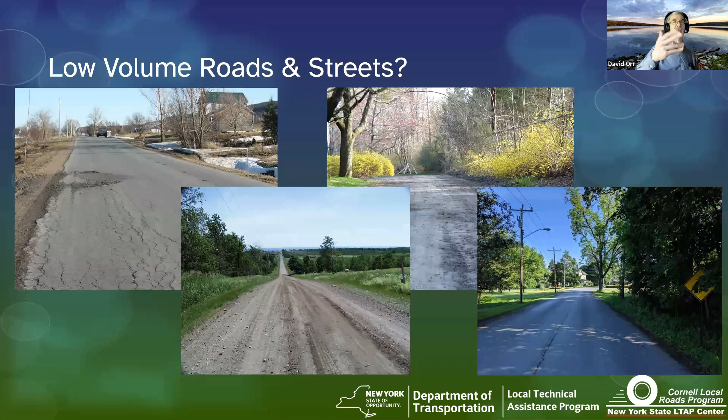Something for us to keep in mind as we're thinking about what is low volume. Let's go through some of the answers you gave, and some we've picked up over the years, and talk about whether they really are low volume. Then we'll come back to what is the defining number for low volume here in a minute.

One of the most common things people use is the word local, by far. In fact, sometimes people use those interchangeably. But local actually has a specific definition to it. We'll come back to that.

A lot of people think of it as rural. We've heard that in our word cloud, or out in the country. That's what a lot of people think: oh, that's rural, that's a low volume road. But obviously the interstate system belies that, because most of the interstates out in the country, in rural areas, doesn't make it low volume.

Residential — generally in an urban area, a village, or a suburban town — a residential street does have less traffic on it than a main road does, but it doesn't mean it necessarily would be low volume. So you have to balance that activity.

We saw gravel on the list, and generally yes, a gravel road is probably low volume, because the economics will tell us we should be paving it if you get too much traffic on it. We'll talk about that in just a second.

Slow speed — nobody said that, mainly because we're dealing with a bunch of highway folks. If I ask this question of elected officials and citizens, a lot of them say slow speed for low volume. And you and I both know that sometimes low volume roads, they actually go faster.

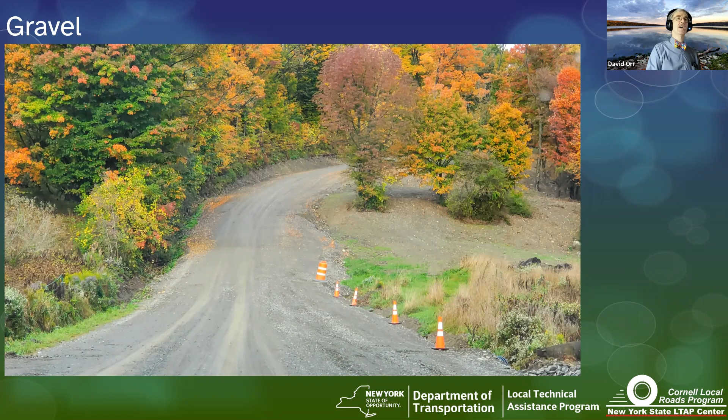We typically think of low volume and slow speed as synonymous, but they're not. Whether you're in urban areas or rural areas, speed is not a direct surrogate for traffic volume. In fact, a lot of times we put in traffic calming, which is a whole different class, specifically because we've got that conflict between wanting people to be slow because it's a residential area or there's really no need to go that fast, versus a demand that people want to go past a certain location, and people tend to speed. So there's that balancing act. Speed, volume, and safety are actually not surrogates of each other. They're correlations, there's relationships, but be careful. We'll talk a lot about safety as we discuss some of these standards as we go along.

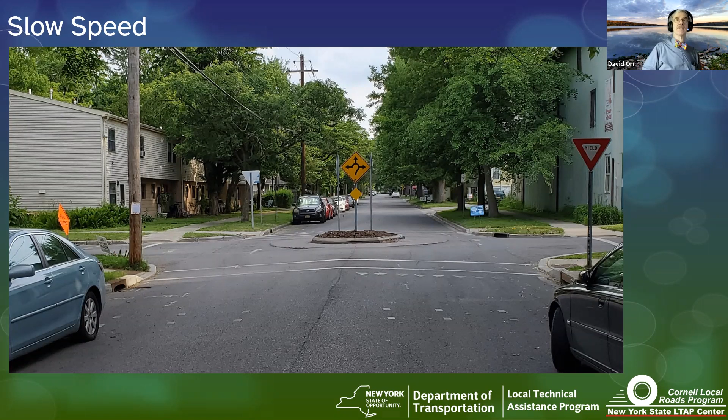What I really want to make sure we understand is that the design of the road should be driven by the road user. That road user could be the residents who live along that roadway. It could be the travelers who go from point A to point B, commuting every day to work or to school. It could be truckers and commercial vehicles taking goods from market to market, supplying us with food, groceries, and things like that.

It could be taxpayers who have nothing to do with that particular roadway. If you're in the town of Ithaca, the taxpayers who live up in the northern part of town on the eastern side are still paying some taxes for a road that's 20 miles away. If you're in a county, it could be 40, 50 miles away, but they're still paying taxes. So you have to keep that in the back of your mind. And of course, about 90% of the towns in New York State elect their highway superintendents, and this is an election year, so about half the highway superintendents in the state are up for election. They have to think about the voters, and the voters may or may not be direct taxpayers, but they're certainly affected by those taxes.

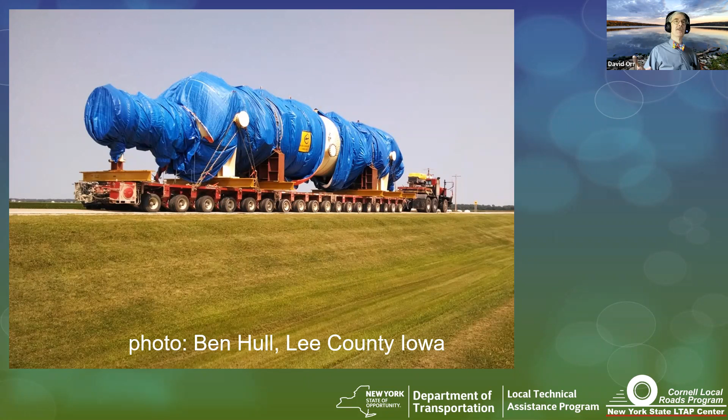So now you keep asking, so here's your opportunity to put in what is a low volume road. I'm going to let you put in your number for what a low volume road is, and we'll see how this works. I think it's supposed to be you put a number and people are able to rank it, but I'm not sure how it works. I've not used this particular polling technique before, so we're going to see how that works.

3,000, less than 3,000, okay. Less than 200, 1,000, okay. People are putting in words as well as numbers. Okay, we got 3,000, 2,000, 250. 1,000 is waiting at the moment, okay.

At the Transportation Research Board, there's a committee on low volume roads. I serve on that committee at the moment, they cycle people, and I like the way they do that. I served on it once before and I'm back on it again. There are huge debates about defining this line of what is a low volume roadway, and I'll show you over the course of the day the two most common lines used. Surprisingly, most of the public likes 1,000, but 1,000 is not the one settled on by AASHTO and some of the other committees looking at this. There are two numbers, centered on each side of 1,000. So 1,000 is a pretty good number when talking to the public, but we'll come back to the two numbers used by lots of people.

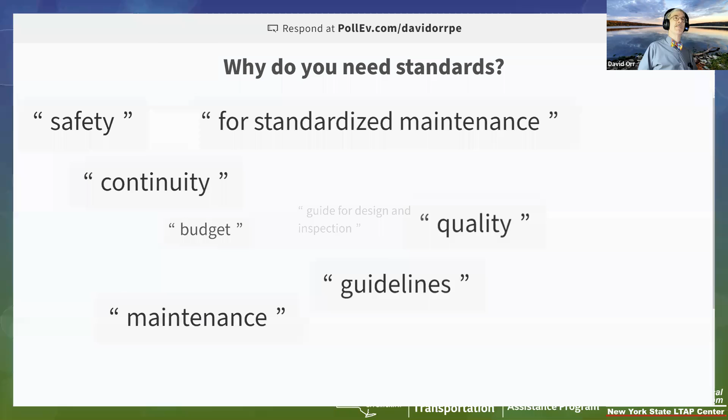Safety is actually one of the most important reasons why. Let's see how y'all did here. I think you're doing a pretty good job at getting all the items on my list, but there are a couple we missed: designed for inspection, consistency, and budget, meaning money.

Let's talk about these items. I bring it up because, like it or not, liability becomes an issue. You really want to reduce your liability. You don't want to get sued because you've got a pretty good road, but somebody wants to hold you to a different standard. If you have no standard and something happens, a crash, we'll talk about that next, and there's a lawsuit, the lawyers involved are going to try to hold you to somebody else's standards.

So do your roads meet the federal and/or state DOT level standards? And if they don't, can you defend them in court? Having appropriate standards can really help you in court, especially if they carry the standards of a national agency behind them, because then someone would have to show that your standards are inadequate. If they've got a national imprint behind them, you're in great shape—from a liability standpoint, one of the best reasons to have standards.

But just as important, and I think even more important, is safety. Good standards improve safety, and even on a low volume road, good consistent standards really help from a safety standpoint. We talked about crash rates being higher on the low volume road system, and a lot of those crashes occur at locations that don't even meet the standards we're talking about today. So it's really important from a safety standpoint, and consistency matters.

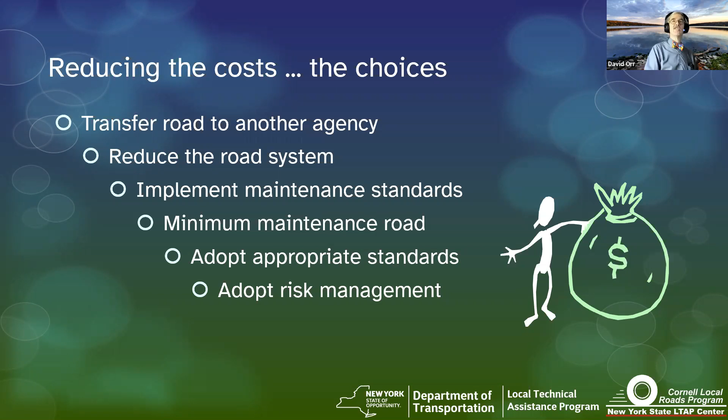All of this comes back to adopting appropriate standards, which is what we're focused on today. We're starting with geometrics. And I hope everybody has a good risk management plan in place to reduce your level of risk, and the standards, as we talked earlier, will help you there. Now, really, if you think about it, everything I've talked about today and everything we're talking about in some respects comes back to communication. A good set of standards communicates to the public what the expectations are.

So it really is a communication issue. And when people ask me what the three most important things in roads is, I usually jokingly say drainage, drainage, and drainage. But actually, truth be told, my big three are almost always the same. The order might change slightly, but it's usually safety, drainage, and communications. You do those three things well, everything else gets pretty easy.

So what are we going to do if we want to adopt an appropriate standard? What's the implementation process? Well, first, we have to adopt the appropriate standard, and that's what we're actually going to be doing here. We're going to be talking about some possible appropriate standards after our first break, though. Actually, we'll probably start with a little bit of that discussion before the first break.

To do that, you have to know what those standards are and then make sure they work on your system. You need to go in and classify all of your local roads, okay? Because when you're dealing with low volume roads, you have to define whether that road fits more as low volume or not. So what standard is it going to fall into? Because your standards are going to have some variation, some ranges to it. So you're going to have to classify all of your jurisdiction's roadways. So if you're with a town, all the town roads. If you're with a city, the city roads or streets. And if you're with a county, it would be the county road or highway system, okay.

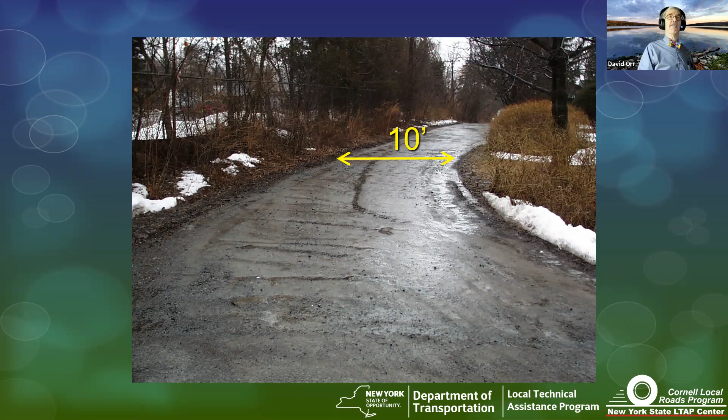By far, most of you, if you could only choose one answer, are choosing B, 22 feet. I don't blame you, for most of our road systems that's probably not the end of the world. But if you think about it, if it's low volume, residential only, 10 feet may be enough. In fact, this is the road I live on, Vine Street. It's got a little odd history, but it's only 10 feet, and it serves the need of the people on it.

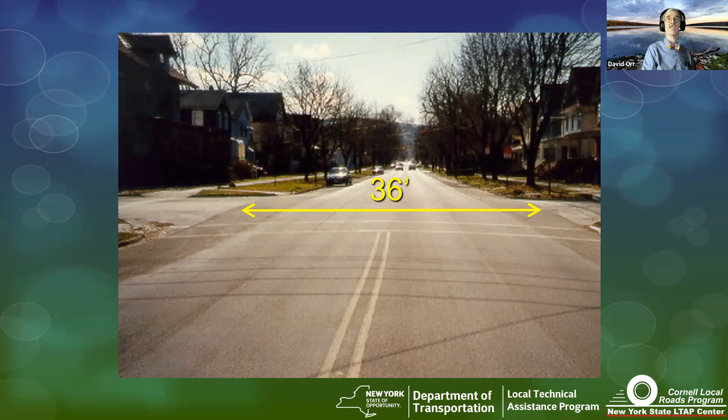This is a road in Yates County. When I was at Yates County, 22 feet was our standard, and that's actually a problem. We should have variations that deal with reality. If you're in the city of Ithaca, 36 feet curb to curb, if you're allowing parking, is probably what you need in a lot of cases, especially if there's buses and it's a higher volume roadway outside that. So if you only had one, yeah, you'd probably pick a number like 22. But the reality is your standards need to have variation in them. Maybe not this much, but the idea is have some variation.

Now, what are appropriate standards? They're clear and easy to understand. I've seen way too many complicated standards. When I first got here to the LTAP Center at Cornell, one of my first tasks was to develop standards, which we now support, and you'll get a copy of, and we'll talk about quite a bit after the first hour and the second hour.

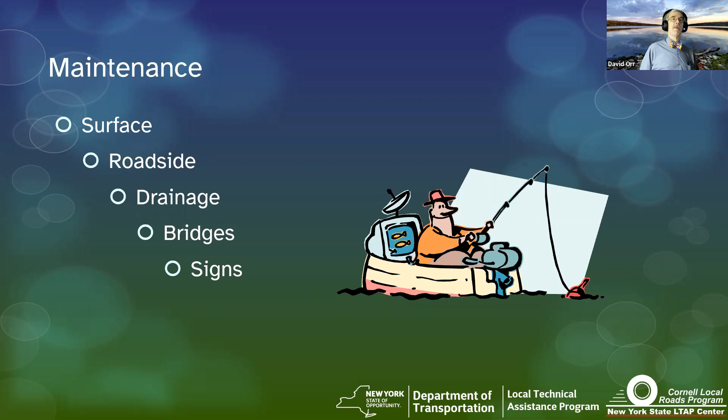Now we're going to take our break, then start back up, and I'm going to spend the hour talking about geometric standards that are out there. We'll spend a little time on the history of geometric standards to help you understand where we're headed for developing your own.

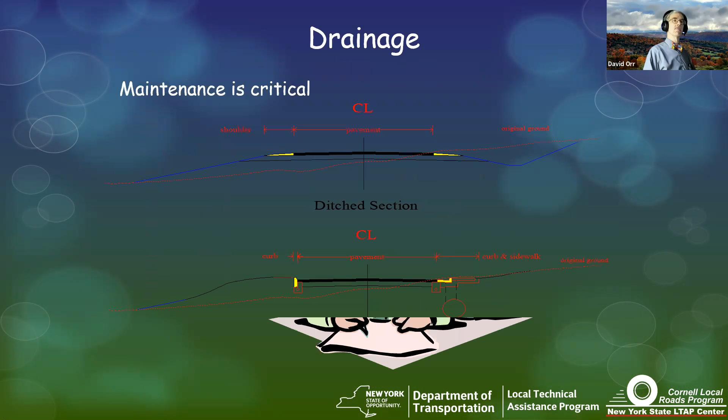Okay. We'll be starting back up here in about a minute. And Amanda, I promised I'd find you that picture of the valley with the fall colors. It's now my background.

Okay, we're going to get started back up now. What I want to do this hour is talk a little bit about some appropriate geometric standards that exist for local and, more importantly, low volume roadways. The key is what makes a good appropriate standard. We talked a lot about that before the break, but what I really want to do is talk about the history and some existing standards that you can use and may need to use for your higher volume roadways, but also the history of how our roads got to where they are.

Now, you may have heard of something called the AASHTO Greenbook. It is the American Association of State Highway and Transportation Officials, AASHTO. It used to be the American Association of State Highway Officials. And the original construction and design procedures actually fell into that procedure.

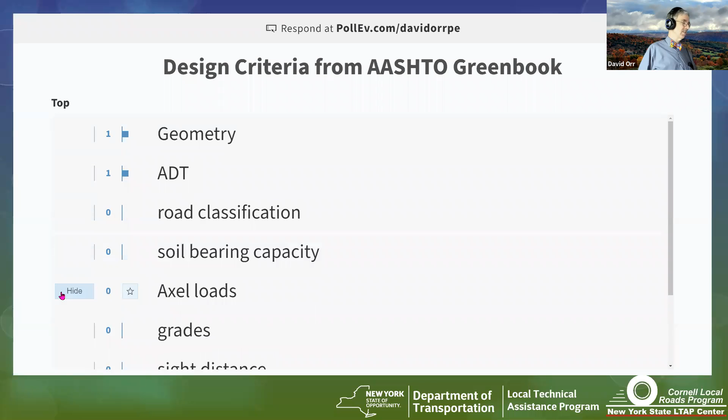So, bearing capacity—now we're talking geometrics right now. The Greenbook is completely on geometrics. It doesn't deal with thickness; that's a different standard, a standard for thickness. So I'm going to hide that for now, since we'll talk about it next week. And axle loads, the same thing. Those are all very important standards, but we'll be talking about them next week.

Okay, so geometry, ADT, road classification, grade, sight distance, safety, design speed. Again, the ones y'all have upvoted are geometry and ADT. Not a lot of votes, but a few votes.

It's important to understand where standards start from, where do they go, what actually defines how we get to that particular location. And while most people would probably think that design speed is a design criterion, it actually is not.

Let's go through what the AASHTO Greenbook uses for designing roadways. How do we get started? Like in a culvert, is it inlet or outlet control? For roads, what does the Greenbook do? If you're wondering, the state has a standard that follows very closely to the AASHTO Greenbook with some minor modifications. It's called the Highway Design Manual. If you're interested, you can get it, and there's a link. It's pretty easy to find off the web.

So the three criteria. The first one is classification, functional classification, going all the way back to the first hour when we talked about how FHWA and DOT define roadways. One of the reasons they define roadways by functional class is so they can design the roadway - what are the standards that we follow. So the three choices are arterials, collectors, and local roads or streets.

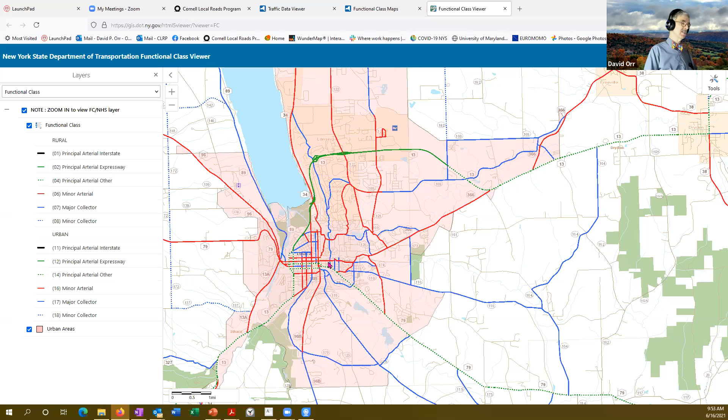Honness Lane, the town of Ithaca. Okay, we can do Honness Lane, I even know where that one is. Someone else said Maple Ave. You could do anything, but let's just go in here. So we go into Tompkins. You can zoom in, you can also search. So Honness Lane is down here because I live in this area.

And if you get down to Honness Lane, for those who are wondering, it's the horizontal line right here between the red and the green. The green is an arterial. The red, which is Pine Tree Road, is also an arterial. A lot of people who live on that road don't want it to be an arterial, but that's what it's defined as. Honness Lane is defined as a local road or street, so that would be local.

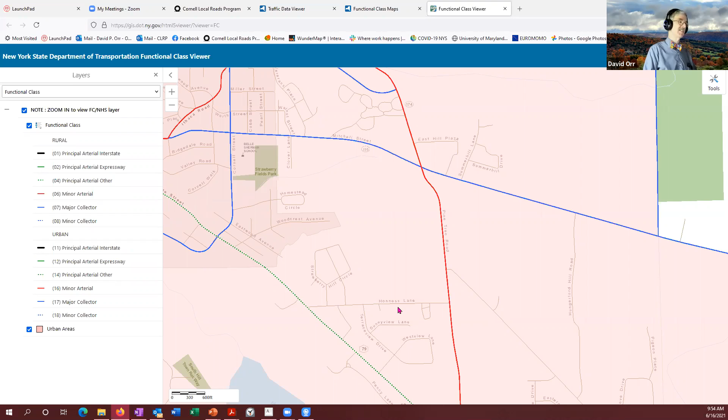And if I pull out a little bit, you can actually see just by colors - the red, which is a minor arterial, the blue, which is a collector, the green, which is an arterial. So the red and the green are the arterial system, and the blue is the collector system. There are roads on here that you can think of that are defined that way, and that's how you would go into the design standard to define them by that technique.

Can they change? Yes. Should they change? Yes. Do they change easily? No. But that is one of the standards. The next standard we look at is the terrain. Someone said slopes or grade. The terrain, we typically define into three different classifications: level terrain, rolling terrain, and mountainous terrain.

One of the things that's really nice about New York State, but also causes us some grief, is that within a single town-sized community we can have all three terrain types very easily. In Yates County, we had large sections that were technically mountainous by AASHTO's definition, like over in the High Tor area where it's pretty steep. Mountainous doesn't mean big huge mountains, it's just the terrain level versus a rolling countryside like you might see in the Finger Lakes. Along the lakes where there are gullies, you can get technically mountainous terrain versus level.

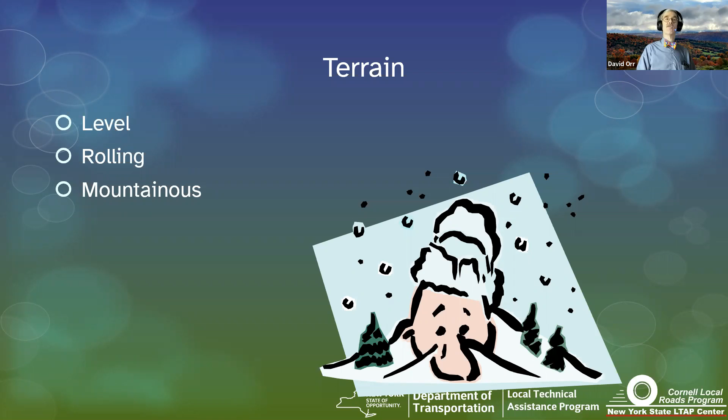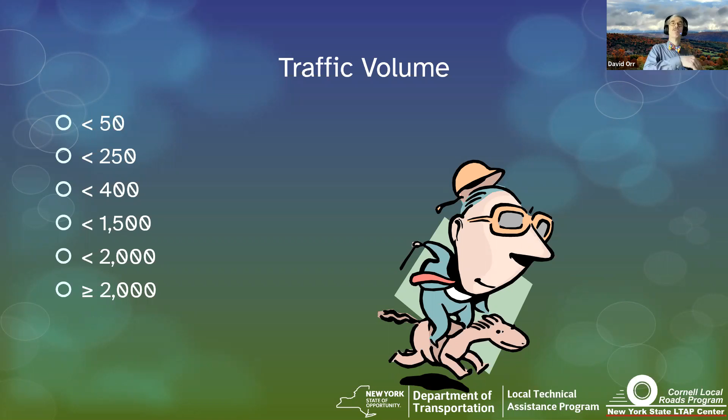So terrain is one factor, and then of course traffic volume. The most common ones are for local roads. Once you've picked the local roads, these are the traffic volume ranges you see on the local road system: 50, 250, 400, 1500, 2000, and greater than 2000. They've got 6 different criteria depending on those other 2 factors: local, and then either level, rolling, or mountainous terrain.

All 3 of these things together combine to give you the design speed. The design speed is not where we start, it's where we end. We get the design speed that will range, for most local roads, 20 to 60 miles an hour. There are some faster than that, but for the most part 20 to 60 miles an hour is the design speed for the local system. All the geometry comes from that, the design speed for the vehicles using that particular roadway.

By far the most commonly used number out of the design speed is the stopping sight distance. The criterion for stopping sight distance has changed over the years, but here's the current standard: it's the height of the eye of a driver in a sedan, technically listed as 3.5 feet or 42 inches above the pavement, and a height of an object 2 feet above the pavement.

What is an object 2 feet above the pavement? What are we trying to not hit? So in the Q&A, tell me what are we actually defining that we don't want to hit when I'm looking down the roadway? What am I trying to not hit?

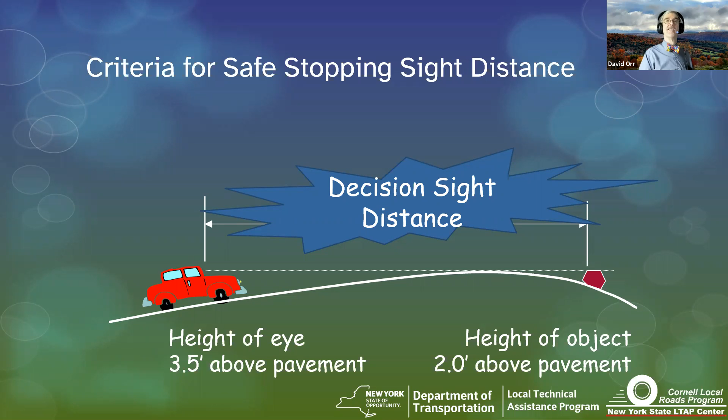So the question we always have to ask is, is it appropriate? Well, yes, it is appropriate for higher volume roadways. It's a very good set of standards and one we should probably be following. But if you think about it, those criteria may not be appropriate when it comes to certain types of roadways. Sure, for arterials and collectors it works pretty well, but when we start looking at local roads, there are some changes that occur. The traffic volumes get low enough that some of the things we're thinking are going to happen, such as conflicts with other vehicles, really drop almost to nothing.

So really, if you think about it, you almost have to look at roads that are above some criterion, and the criterion that was initially used was 400 vehicles per day—I'll come back to why in a minute—versus roads under 400 vehicles per day. There's some logic behind that, and again, we'll come back to that in just a minute. But things change when you get to lower volume.

If we're looking at the AASHTO standards for roads between 400 and 2,000 vehicles a day in a rural setting, local system, typically 2 lanes wide, the pavement width—not shoulder, pavement width—ranges from 18 to 24 feet. The design speed, remember, is based on terrain. The terrain behind me would be considered rolling, by the way, if you're wondering—rolling terrain in the valley near Preble, New York. And then the width would be based upon the speed people are actually doing, which comes back from those other criteria, so there's actually a little bit of duplication going on.

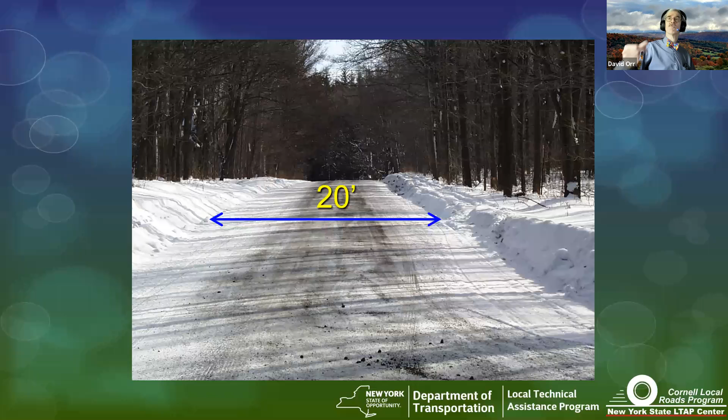Is 20 feet needed on a really low volume road though? Is it appropriate? Maybe not. So here's the problem: are we building too much up in our rural system?

Let's look at some data from a few years ago. They haven't changed that much by percentage. So while the volumes have gone up some, the percentages are still pretty much the same.

So if we break the roads down, this is data from the state DOT by interstate, other arterials, collectors, collectors less than 500 vehicles per day (that's the number the DOT uses), and local roads, again by functional classification, not ownership, less than 500 and more than 500. This is the portion of roads by centerline mileage in all of New York State.

As an example, Tim, I know you're on here, up in Lewis County, that road I showed, West Road or West Avenue, I can't remember which it is, that's technically, I'm pretty sure, a collector.

It's a very small volume of traffic overall, but by centerline mileage, local roads less than 500 vehicles makes up over half the centerline mileage in the state. If you combine together all of the roads that are less than 500, you're getting up towards 55% or so, and even above 500, you're over three-quarters of the mileage of the roads in the state.

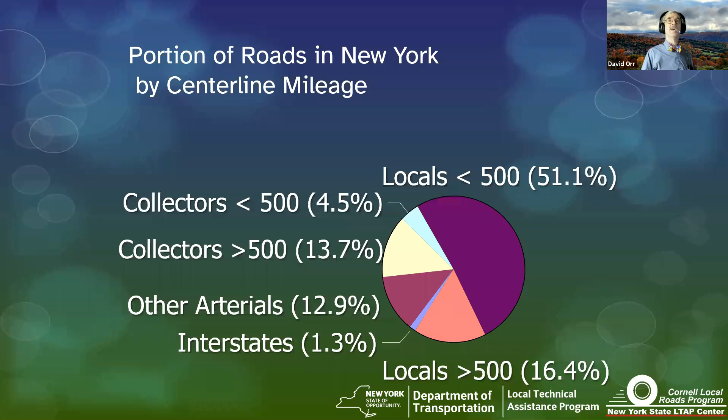Back in 1992, a report was generated by the Local Roads Research and Coordination Council, and they put out a guideline for rural town and county roads. The reason they did this was that they found the existing guidelines, i.e. the Greenbook, the existing guidelines for design and maintenance of rural highways having low volumes, were not appropriate. That's the problem - they weren't really appropriate. They were overly wide for the roadways as were actually used and maintained.

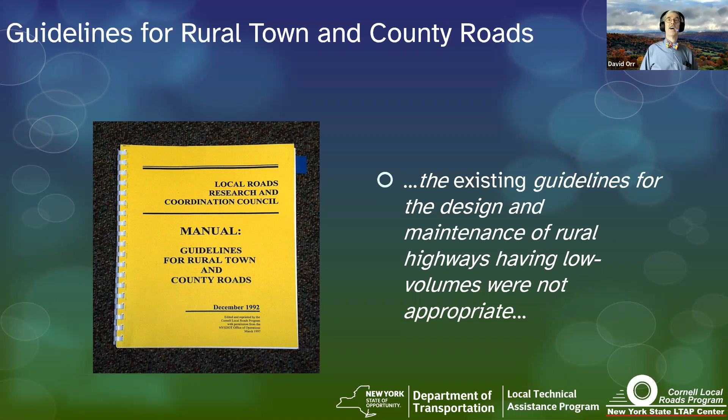So they came up with a set of standards. This was a commission put together by the first Governor Cuomo, and they define low volume roads as under 400 vehicles per day.

Now why 400, and the state reports 500, and we all talked about 1,000? Where did all these numbers come from? Well, before we do that, let's figure out what the traffic volumes are and show you a way you can actually estimate traffic.

I'm going to give you two really good ways to estimate traffic. Now, before I do that, if you own a traffic counter in your agency, raise your hand using the participant list. So I got a couple.

Cool, good. There are techniques for counting traffic. Even though you own a counter, there are techniques. Do you want the whole week count? So you've got to do the weekend. Do you avoid seasonality? Do you have seasonal issues? Do you do a holiday or not a holiday, and does that holiday really affect traffic volume? So you can do a traffic count, but there are techniques involved.

So if you're using those, please make sure you understand that. But I'm going to give you two methods. So in the Q&A, does anybody else know how I could get the traffic volume?

In this case, I've got a rural - this is actually West Avenue again - and an urban intersection. How could I estimate the traffic in those two areas? Anybody got an idea? I'll give you two, my favorite two ways to do this.

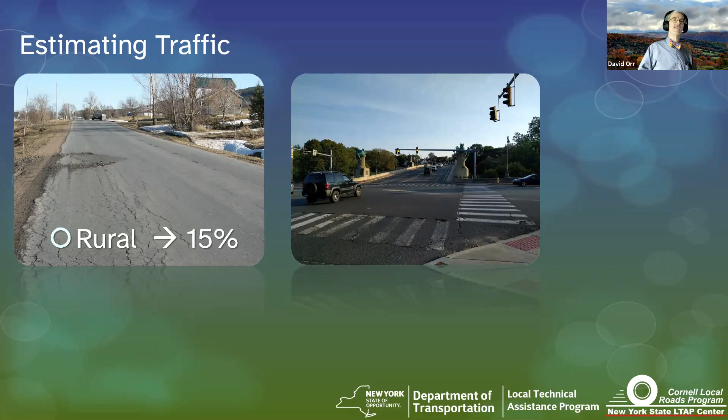So what you do is take advantage of the fact that in rural areas, the busiest hour of the day is about 15% of the traffic on that roadway. In an urban area, the busiest hour of the day is about 11% of the traffic.

You can actually take that into account. So what you do is go out during that busiest hour and count for just 15 minutes. You don't even have to count for a whole hour, literally just count for about 15 minutes. Though obviously if it's really low volume, you may need longer than that. But again, we're just looking to get us in the ballpark, and we don't need to be much more precise than that in most cases.

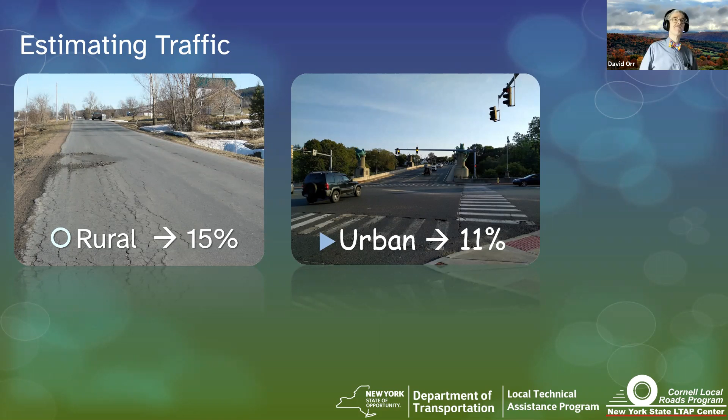You can actually turn that into the traffic count for the entire day. So if I count for 15 minutes, multiply it times 4, that gives me the 1-hour count for the busiest hour of the day, and divide it by that percentage. So in a really rural area, I divide by 0.15 or 15%. In an urban area, I would divide by 0.11.

And if I'm not quite sure—I know some of you are here from the town of Ithaca—if you're out on one of the rural roads that's suburban and you're not quite sure which it fits into, you could use 13%. It'll get you close.

And then decide what you need for a counter. By the way, if you have a counter and you do this little technique as well, and there's a big discrepancy, check—it could be an issue with the counter, or something about the traffic you're not aware of. Maybe there's a detour in the area. That does happen, so be aware of that fact.

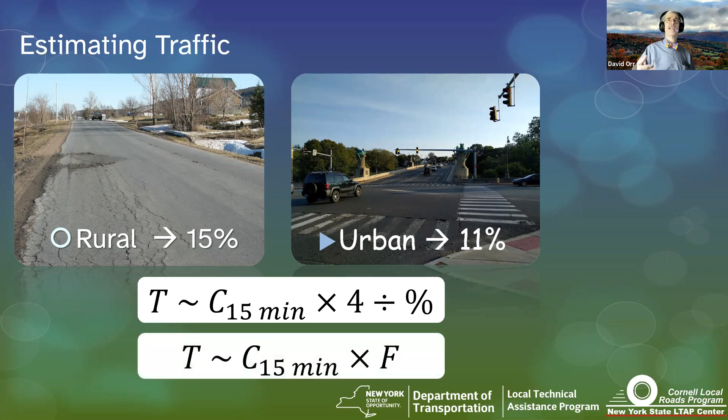Now, you could do that division, or you could also just use a simple factor, and again, most of the time we don't need to get down that precise. So the factor you'd use for rural areas is 27—you just take the count and multiply it times 27. In an urban area, you would multiply the number by 36. It's not exact, but again, we're trying to get close.

As an example, okay, let me see if my pen is being happy with me here. I'm just going to go out there and count in the morning, standing there when people are going to work. I stand there for 15 minutes, and in 15 minutes I count 15 vehicles.

So if I counted 15 vehicles, how many vehicles is that for the entire day? We'll start with our rural area—how many vehicles is that? You get out your calculator, and you can either multiply 15 times 27, or if you want, do the longer calculation, which is a little more precise but I'm not that worried about it: times 4, divided by the percentage. Let's see if somebody wants to throw the answer in the Q&A, and I'm going to write the answer down on the screen here.

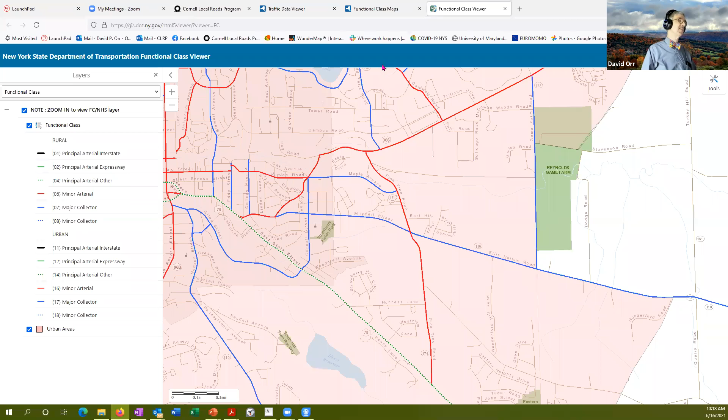Now the other way you can do a traffic count that I also always recommend to people - not only do you have a functional classification viewer, you also have available from the state a traffic data viewer. So that's on your notes, write down traffic data viewer. Absolutely cool tool. So I'm going to open the traffic data viewer. Again, it's GIS based, and you can get traffic counts on lots of roads. They're all stored into the system.

Every time I look at this, I'm always amazed by some roads that have counts. The state roads, almost all have a count on them. The local system, if it has a bridge, it has a traffic count on it. So anytime you've got a bridge, you're going to have a traffic count.

So let me scroll back down here into Ithaca. And the computer is going to, let's see if it's going to be nice to me today. No, it's still running. The traffic data viewer some days is... we'll try looking at your road. That would be up in Lewis County. Okay, we'll go back, the computer is being slow right now.

So I got Lewis County, and you think Brantingham? I'll search for Brantingham, it may not find it. It doesn't have every single roadway. And again, this morning it's spinning. That's why I don't rely on these things.

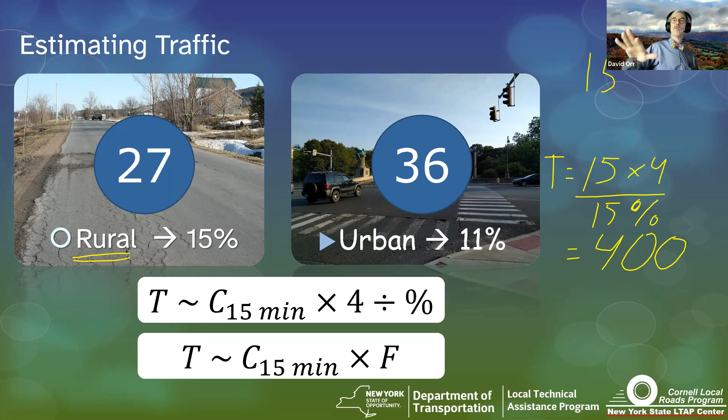And we'll see if the internet comes up and is happier with me a little bit. But that's a way to estimate traffic. And that's where that 400 line comes from that you'll see come into play. And those guidelines, they looked at 400 as being the cutoff point, because again, they were looking at rural roads more than or less than one vehicle per minute during the busiest hour of the day. And the idea was pretty simple.

Three typical road types, keep it simple but have flexibility. So they had an all-purpose road. They had an area service road, which is 2 lanes that might just serve residences or a farm. And then what they call the 1-lane area service road, maybe it goes up to agricultural lands or up into where there's a forest or something.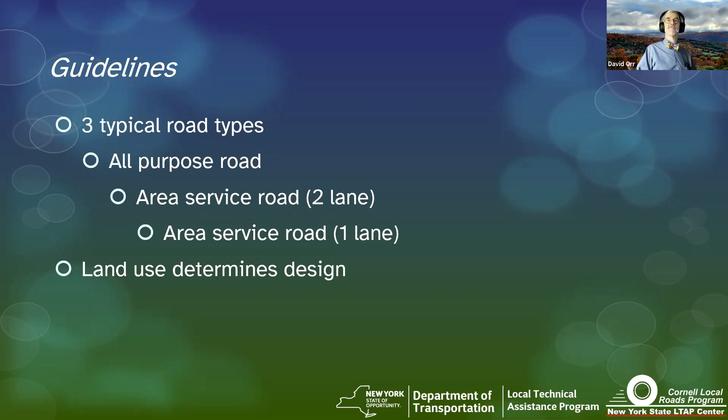Just 3 simple road types. But rather than going in with terrain and functional classification, they said, who's using the road? In other words, land use determines the design. So in terms of land use, they made a list of the different land uses that existed: low volume collector, major roads, residential, farm access, resource industrial, agricultural, and recreational land. And you would choose from there one of the 3 classifications.

Now, I will come back to this list when I talk a little bit more about a different standard. Just keep this in the back of your head. And if you're interested, this is one of the things we sent you to. You can download the guidelines directly from our website. If you're not sure what it looks like, it's got a cover on it with a weight limit sign. It's from the Legislative Commission on Rural Resources. They still support that document.

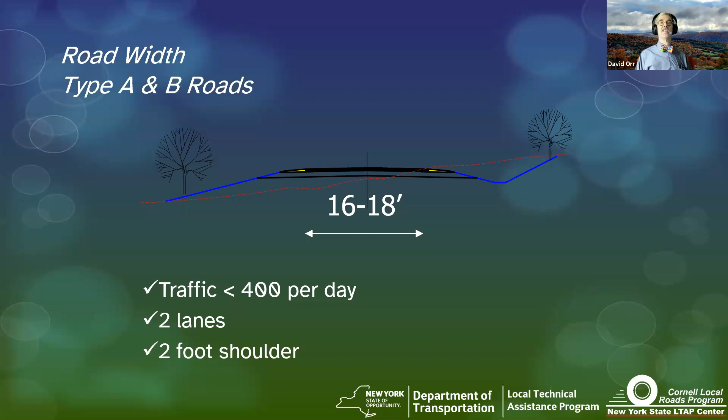The roadway widths, the A and the B, 16 to 18 feet. 2 lanes, 2-foot shoulder, low traffic volume. Slightly wider for an A versus a B, and slightly wider if you had a lot of trucks. You'd add 2 feet or 4 feet, depending on the truck volume and the types of trucks. In other words, design the road for who's using it, not defining it by terrain and traffic volume, but by the vehicles that actually need to use the roadway. So that roadway we showed earlier, 16 feet wide, serves the needs of the people who live on it, perfectly adequate.

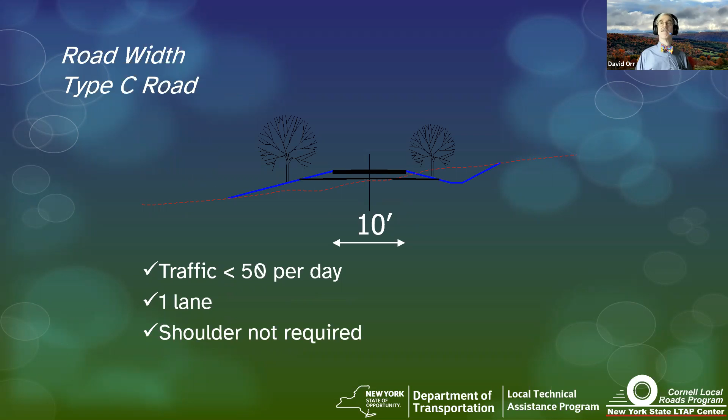Now let's talk a little bit about the minimum maintenance roadway. There's two choices. Here in New York State, we have a seasonal limited use highway and we have a minimum maintenance roadway option. We'll talk about that in just a little bit. But seasonal limited use highways, right now, as of today, there are no seasonal limited use highways in New York State.

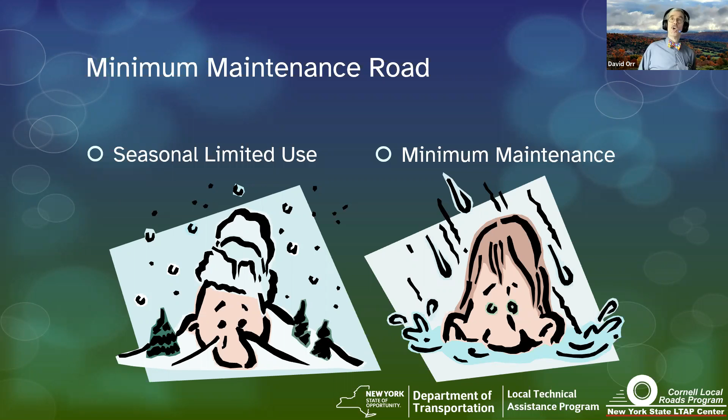Think about that. Well, the way the law works, it's Section 205 of the Highway Law. And essentially what it says is that the town, technically even a county road can be this, but it's in the town law portion. You can stop plowing from December 1st to April 1st.

You can only do this if there's no year-round use on that roadway. So it has to be declared by the highway superintendent by November of each year. So each year you have to look at your entire road network and define, hey, that roadway doesn't have year-round use. There's not a residence on it. There's not a farm structure that needs access in the winter. And so I can stop plowing it.

If someone builds a house on that roadway right now and they get an occupancy permit, you can't declare it a seasonal limited use highway in November. You have to maintain it. You've got to resume service. And that happens quite often, more often than we'd like. There's not a huge number of them, but for a small town, that can be a very expensive operation that you'd have to deal with.

The idea in the guidelines that they put out is the idea of the minimum maintenance roadway, and that comes from the Midwest. It's used quite often out there. And the idea is you can set any dates you want for any activity. You don't define just snow plowing. You might even close it in the summer. Maybe it's only roads going to a ski area, so we don't maintain it in the summer. We let it grow up and get weedy. We don't care.

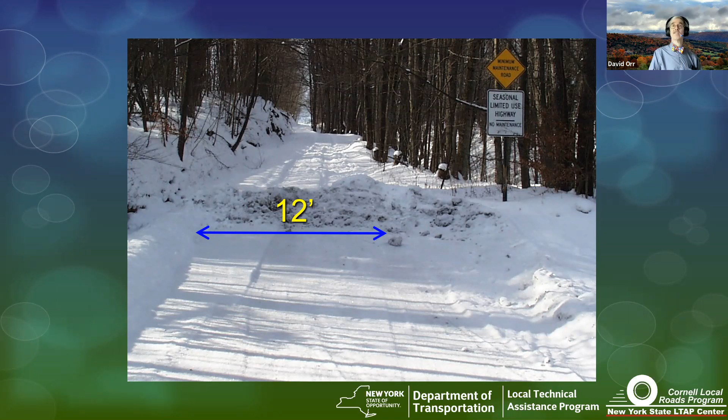This 12-foot wide width is fine for a seasonal limited use or minimum maintenance roadway. The bigger issue, however, is if someone did put a house on here, would you have to suddenly start maintaining it again?

That implementation process we talked about is part of developing minimum maintenance. You actually have to go through that whole process, not just of the roads you want to classify as minimum maintenance, but your entire road network. And that's really important, because you need a basis for saying why you chose this road versus that road.

Now, is this appropriate? Yeah, actually it is. You can go online, search for Tug Hill, and find a map of the towns that have adopted this standard. Most of them are in the Tug Hill, but there are communities all over the state. The closest one here in Ithaca that I know adopted it is the town of Caroline.

If you don't have any roads that aren't used year-round, there's no point. But there is an alternative that might help you out. Maybe not minimum maintenance, but AASHTO put out a set of guidelines back in 2001 for very, very low volume roads - less than 400 vehicles a day.

That was the official name of it - the geometric design of very low volume local roads. So it was a subset of the local roads section out of the big Greenbook. Over the years, they've made some changes to it, added to it. As of 2019, they have a new version.

Now, I will tell you, I've got a copy of it myself. It's only available digitally, but if you own the digital copy, you can print one out. It was updated in 2019, and you'll notice a slight design change or name change. The name is now the AASHTO guidelines for low volume roads.

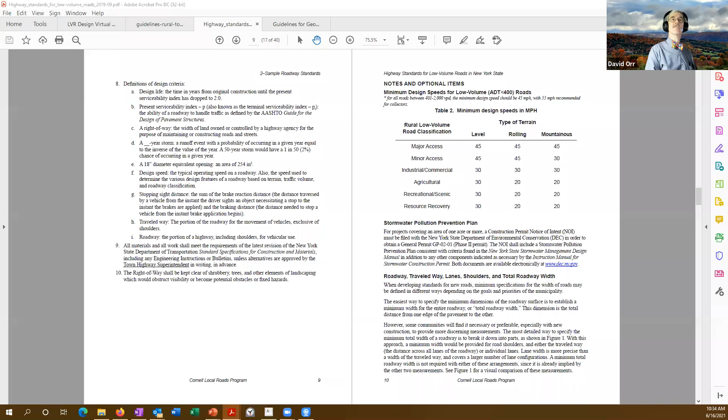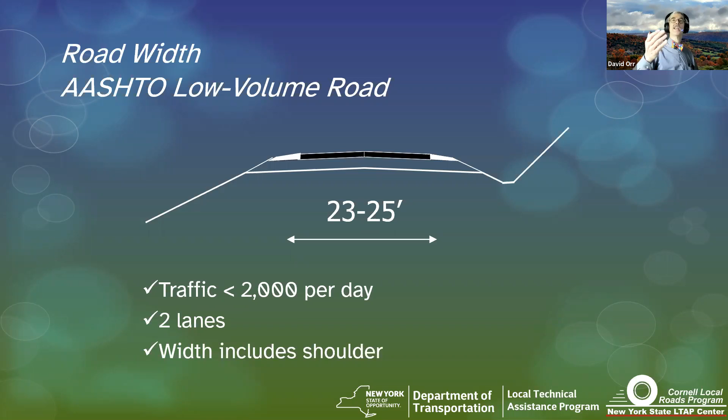And then finally, streets, 18 to 38 feet, which obviously is driven by whether there's parking lanes or not. If you don't have parking lanes, you might be down as little as 18 feet in an urban area, but it depends on the density and the number of channels. And if you're wondering what the number of channels means, it's not quite the number of lanes, it's more the number of vehicle sort of lanes in terms of channels of traffic that you need to take care of.

I'm not going to get into the complexity of it. Most low volume roads, just look at 2 and you're going to be fine. Generally, by the time you get up to having 3 channels, your volumes are high enough that you're going to be looking at the Greenbook anyway. Now, is this appropriate? Yeah, it's appropriate, but you have to define that.

So what we're going to do now is take our second break. And while we're taking the break, I've got a mission for you. There's something missing from the Greenbook, the little Greenbook as it's sometimes called, the AASHTO Low Volume Design Guides. I want you to think about what that might be. I'll give you a hint: these standards, while they borrowed them from New York, were developed by people who live in the Midwest. And it's not because they were bad, they just missed it. So ask yourself while we take our break, and we'll see you at 11 o'clock.

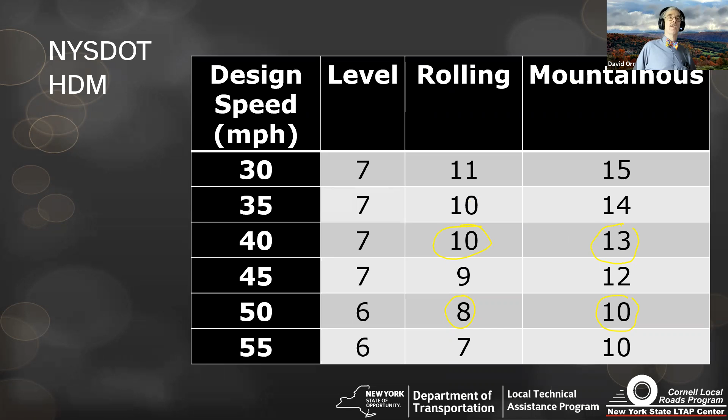The low volume guidelines only have two speeds, less than 45 and 45 and above. So typically I'd say, for my community, I'm going to pick a couple of criteria. I probably wouldn't go all the way down to 15, but maybe if you've got a lot of mountainous terrain, you go with 13 and 10. Versus if it's more commonly rolling for most of your area, maybe you go with 8 and 10. Give yourself some flexibility. You probably don't need to worry too much about it for the low volume situation, so you could pick rolling or mountainous depending on your terrain. And document it—document why you've done it.

So at the end of the day, you can have an appropriate standard. You can decide to either use the AASHTO Green Book in its entirety, and that's fine. And be honest, if you're with the state, you're going to use the HDM, and that's going to be the standard you use, and that's good—it's defensible, it's a consistent standard. Or if you'd like, you could use the guidelines developed by the Local Roads Coordination Council, or you could use the AASHTO Little Green Book. The difference between the two is, for the most part, the guidelines have a maximum ADT, or vehicles per day, of 400, average daily traffic, while the AASHTO Little Green Book goes up to 2,000.

You'll sometimes see both terms used—vehicles per day and average daily traffic—they're similar, I don't go crazy about the two. The nice thing about 2,000 is it really covers most roads in New York State that are in the local system, owned by local jurisdictions. And it has a cutoff inside of it of 400 vehicles between the two ends, and guess what, that's really a hybrid model anyway. And you could develop your own standards.

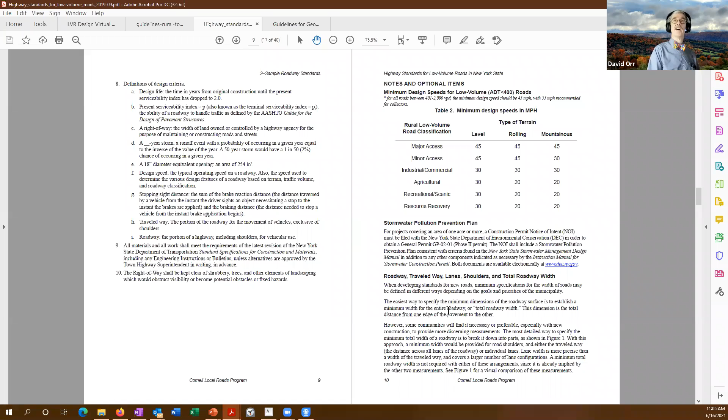Let me just go over to the ones we've got on our website real quick. This would be the standards you can go with if you'd like. You could start here, and you could always modify it to one of those. We developed this—we talked about why you need to do it, why you need to adopt standards. If somebody asks, there's some information in there. There's some sample roadway standards—this would be the actual thing you would adopt, and we're going to go through this in more detail here in a minute. So if you've got it with you, we can talk about these numbers.

One of the things we did throughout this document is underline things you may want to change or that typically get changed. So for instance, the name of the town, whether it's the town clerk, county clerk, or village clerk—you might want to change those things. And the actual design criteria themselves might change some, okay.

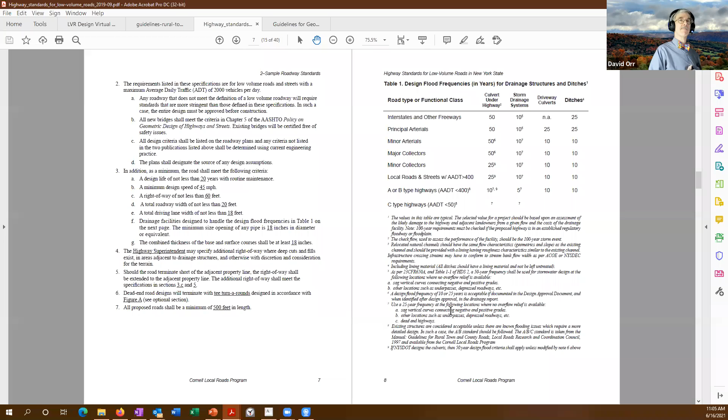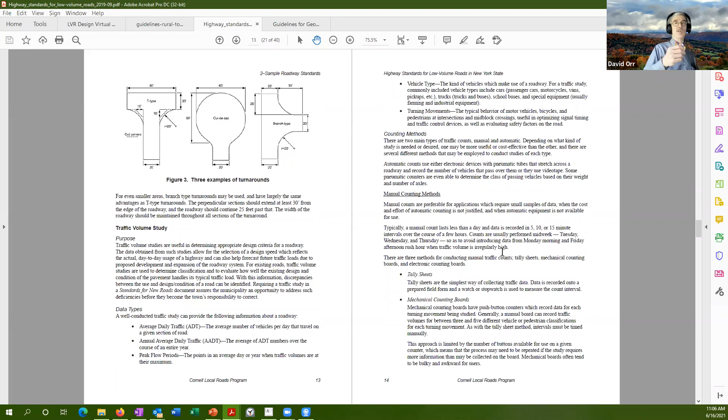And towards the end of this, we actually added some other features based upon your suggestions, such as what do you do about calculating an extended right-of-way, or what do you do when you've got a dead-end roadway—do you put in a cul-de-sac or a turning T? How do you do traffic counts? And finally, if you decide you want to do a minimum maintenance roadway, we gave you some text for local law if you'd like to adopt this yourself. Again, all of that's available in the guidelines themselves.

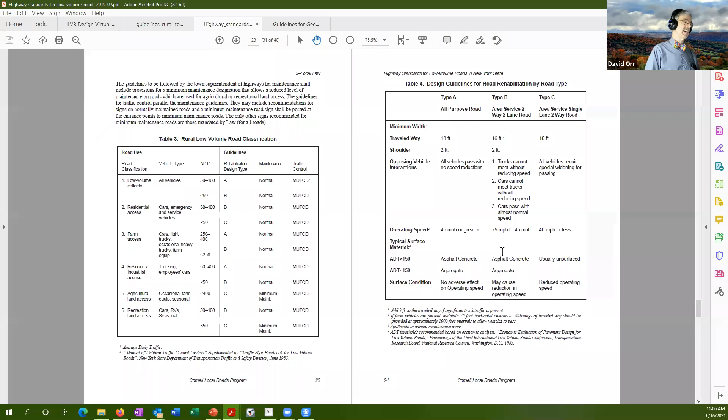So we're going to use that. And I'm going to purposely stop right here, and we're going to go back to the slide deck.

Just to remind you of the implementation process: you need to adopt standards. Typically that's done by the highway official, but the town board should adopt it as well. While you, as a highway official, can adopt these standards, the town board could technically override you—better do it as a joint activity since they're paying the bill, you're doing the implementation, everybody wins. Adopt them together. Classify your local roads by where they fit within the different standards, determine the existing conditions, identify the needs to upgrade, and then develop an asset management plan to upgrade your roads just like you do anything else. And finally, develop and implement the action plan.

What I'm going to do now is talk about the local road specifications. We'll walk through this a bit, but keep in the back of your mind what I said earlier: easy to understand. I'm a firm believer in the KISS principle. Keep it simple. Don't go overly crazy with your design criterion.

When you download this, even with all of that extra text, the total number of pages is 40, if you count 2 blank pages in the back that we put in because it fits the folio better and you can use it for notes. It's simple. Why is it simple?

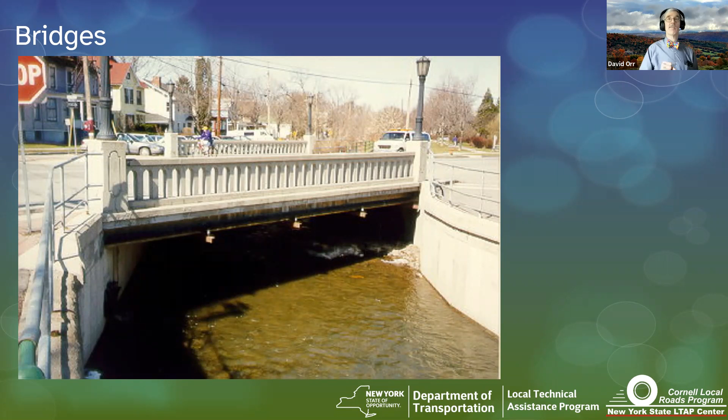So what I really do want to do is get a conversation started, which is really hard to do remotely, but I'm hoping you guys can help me out. Let's talk about clear zone. Again, the guidelines have a number that we recommend in here, but what clear zone width would you use in your community? What do you think you would have as your clear zone width? Put it in the Q&A. What do you think you'd like to see for a minimum and a desirable clear zone width?

At least the highway right-of-way, minimum of 20 feet. You don't have to put in a specific clear zone for every single road. Both the guidelines and the AASHTO Little Green Book have clear zone numbers, and you could just refer to them. You'll think I'm crazy for low volume roads with some of the numbers you're throwing out here, but the general rule of thumb in the guidelines and the AASHTO Little Green Book, you're going to love this: 2-foot minimum, 10-foot desired, wider where needed. And if it's really low volume, 2 feet is maybe all you need. Now you're probably thinking, because a lot of you put in there 20 feet, 25 feet, 10 feet on each side - how many of your own roads actually meet that criterion today?

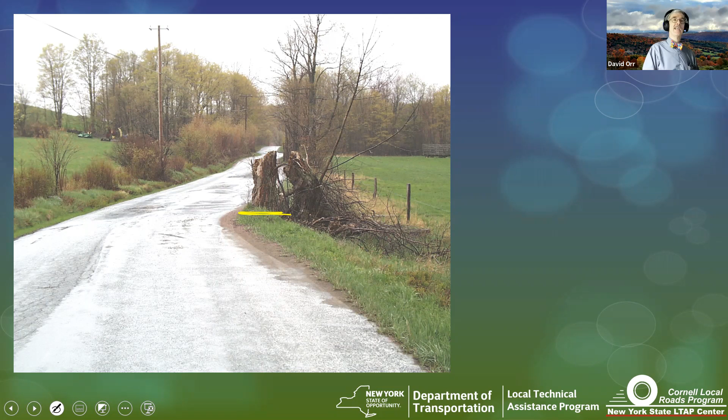You don't have to go crazy in a rural roadway. Here's somebody who put a fence on the inside of the curve. I'm a little concerned about sight distance, but not that concerned. It's low volume, relatively low speed, and the people driving it all live there.

So not bad. And by the way, the clear zone doesn't just have to be trees. The clear zone in this particular case is here. If a vehicle gets any further off that roadway than the edge of that shoulder, they're in trouble—they're going to have themselves a really bad day. That's part of the clear zone too. The clear zone is traversable, and that's too steep. I'll come back to this ditch in a little bit.

Now, I know this is in our standards: we have a minimum roadbed thickness. We say at least a certain thickness in our standard, and we ask for a certain design life. Why would we want a minimum thickness? For a brand new roadway, why would I want a minimum thickness? And I'm not talking structure—why would I want a minimum thickness no matter what?

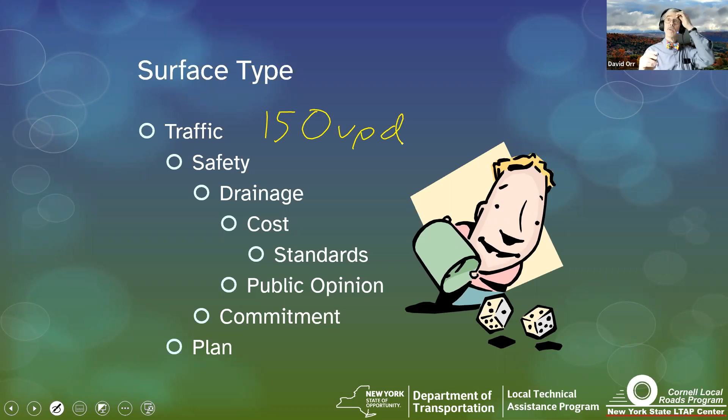But I can tell you right now, if you get into hilly terrain, that number goes down. It's actually less expensive long term to pave those roads sometimes when they get really steep, because they lose so much gravel due to vehicles going up and down and due to erosion.

And that's what usually drives it. You've got to look at safety issues and drainage, and of course cost. How much do you have to maintain it? What are your standards? Public opinion is part of it, but one of the big mistakes we make a lot of times when we take a road from unpaved to paved is we change all the geometry. So we don't really have an apples to apples comparison. You don't necessarily have to make the road wider and straighter just because you chip sealed it or paved it.

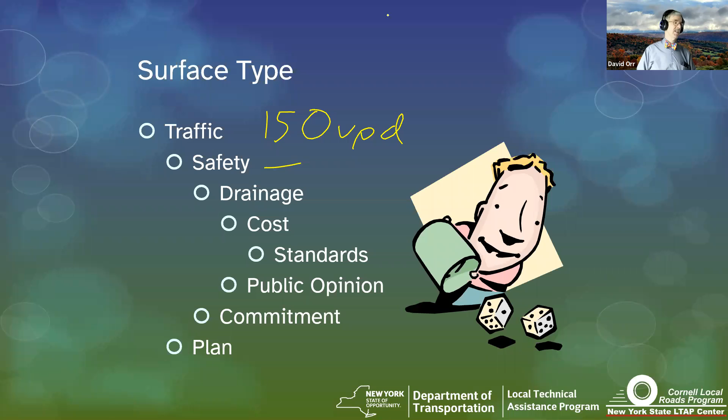And then, do you have a plan, and is there a commitment to follow that plan? If you don't, it can get very challenging. In terms of which option to choose, at the end of the day I'm a big fan of long-term cost. If you do your long-term cost, that includes your initial cost to rebuild it, your maintenance cost, the cost for the users, a rough road costs them more money, and the opportunity cost. We could spend the rest of the time together talking about that.

But I do want to point out one really important thing. As I said, in the back of that gravel maintenance and design manual, which is on our website under publications, you can look up a good detailed list. But let's look at the gravel itself.

These are data that we generated long before I came, and we continue to tweak, look, and modify it. But what it comes down to is the mixture of material you're using to build the roadway should be 50 to 70% gravel. That's where the strength comes from, the big particles. It needs some sand in it to help compact it. And in terms of the number of fines, clays and silts, if you're underneath the surface, this one says 10%.

That's what you see in a lot of places. We actually recommend these days 8%. And to be honest with you, if I had my druthers, I'd like to see that down under 5% if I can get it. But whether it's available or not, the cleaner the better. Above 8%, it becomes frost susceptible. So that's why we like 8%, and the cleaner is better.

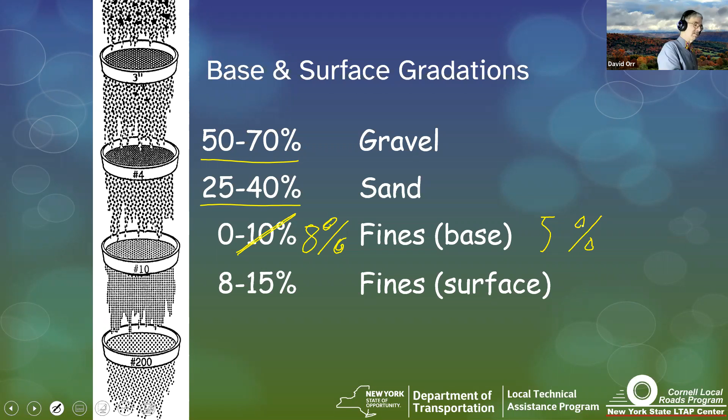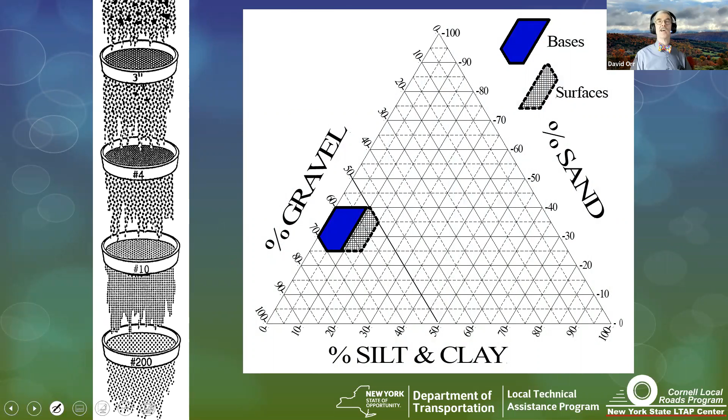But you need some fines on your surface. That's the key to remember: you need some fines on the surface. So if we look at this in chart form, for our base roadways we want to be in the blue. For our surfaces, we need to be in the dashed zone. And what happens a lot of times is we take a roadway that had been properly maintained as a gravel roadway and holding up pretty well, but traffic volumes go up, so we chip seal it or we pave it.

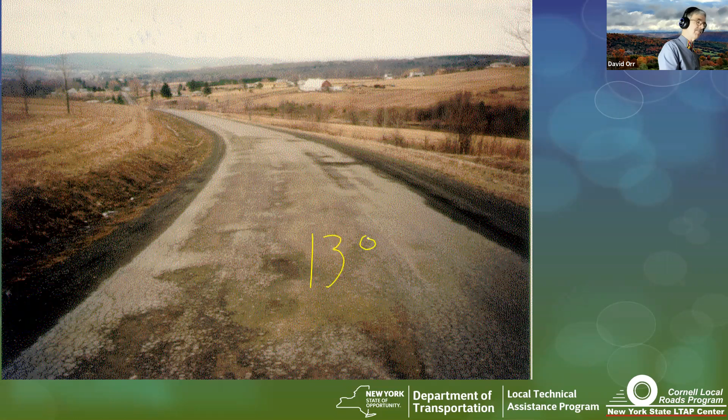Please be very careful about that. That's not a structural issue, that's a design issue. This roadway was chip sealed. The fines content was 13%, and less than a year later it blew itself apart. If you've got a dirty base, it's going to have problems. Good gravel surface, poor quality base.

And when trying to decide between A, B, C, and D, you've got to look at the cost. And you need to include not only the cost of any materials you're going to bring in, and any invoices you get from a contractor, but your own labor and equipment. You have to include them to be able to do an apples to apples comparison.

Now, we did a project. We looked at a couple of town roads, and we looked at the cost of three different surfaces for a road that was in about the 400 vehicle range, 275 actually, if I remember correctly. So it was 275 vehicles per day.

A gravel road was costing, this particular one for a town, about $1.42 per square. If they chip sealed it after cleaning up the gravel and either replacing it or stabilizing it, they could actually get the price down to $1.34. But if they went ahead and paved it, it would actually cost them more money. So they didn't need the structure, they didn't need to go all the way up to a paved roadway. They could get away with a good chip seal after they cleaned up the gravel.

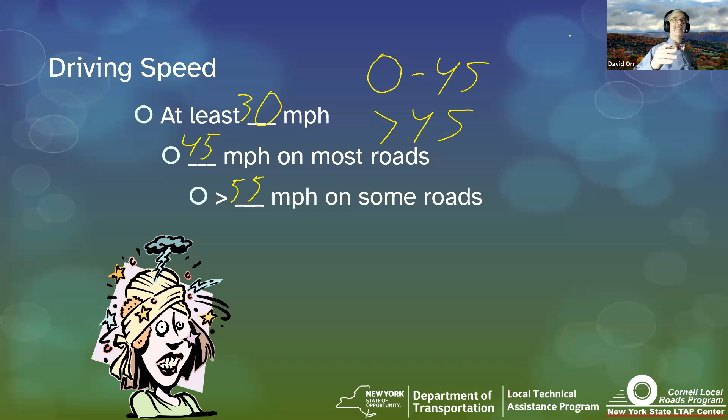I can tell you right now when it comes to driving speed, the biggest thing I always look for is consistency. More than anything else, I want to be consistent because that really improves safety. You want your corners to have the nice widen on the inside. You want to get rid of dips and dives.

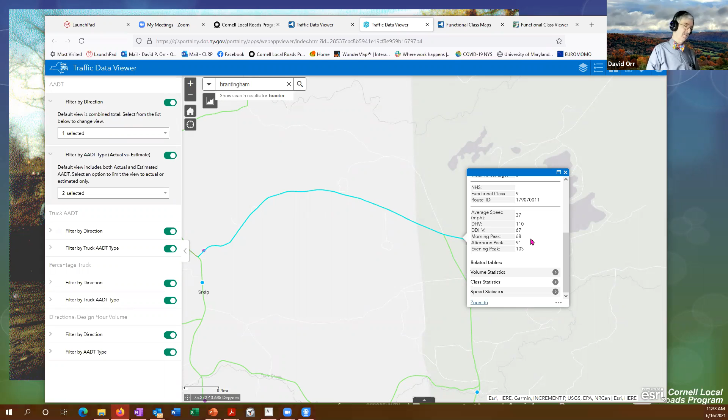Now, what is the right of way? What do you want the right of way to be as a minimum in your standards? What would you like this to be in our standard? What do we want for the minimum right of way?

The state standard talks about 4 rods. There's a unit we all use every day. Everybody knows what a rod is, right? 4 rods? Yeah, 4 rods. So what's 4 rods, Tim? I'm going to ask you now, what's 4 rods? Very good, 66 feet, because a rod is 16 and a half feet.

What? Okay, I usually use 60. That's what we put. Again, you can put this in your standards. 60 feet, you could put 66 or 4 rods if you prefer. But the bigger thing, I think more important, is to put a minimum, at least a certain width, but realize it not only should it be variable, but it really should be wider in a lot of cases.

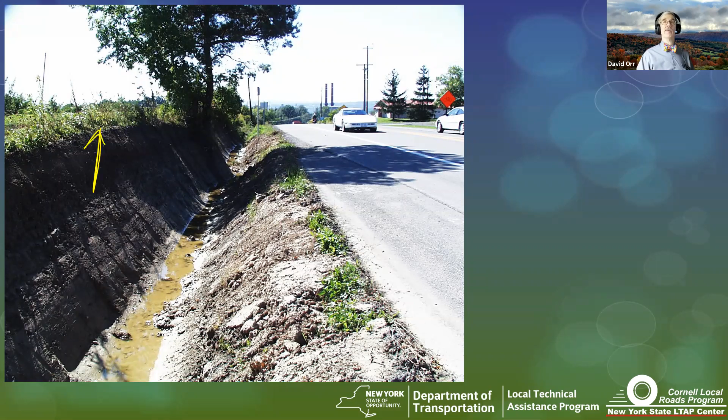If we need more width, we have to think about it. I know politically it's difficult, but it might be better off to go wider. Or you have to think about rail, or what they did in this case was actually cheaper than rail, but in the long run, just leaving the swale would have been better. They actually filled it in with pipe. They put in a pipe underneath, filled the whole ditch in, so now if you run off, you're just on grass. It can be done. I actually like the filled ditches. It's not a bad concept. It really does work well.

Do you do perforated pipe? It depends on the need. In this case, at the top of a slope, you probably don't need to, but yes, I actually like perforated pipe. But remember, a lot of times it might be pretty big. If you're doing anything larger than the 6-inch standard perforation, go get an engineer to help you with the hydraulics and make sure it's going to work well, and that you're not going to actually bring water to the roadway, and figure out the bedding and all that stuff.

By the way, if you're wondering, you see that tree there? That tree survived. In fact, that's the tree right there, that pine tree. It's thrived in the 10, 15 years since they did this. But again, right of way should not be our defining thing, but I know it is. Think about that, if you can get wider, that's better.

So the width, again, that's the nice thing about having a set of guidelines. You can follow the guidelines, but you can also say, yes, I know those are the standards, but I want a minimum width of X. So what number would you put in there? Well, that would depend. You could say a minimum of 20 feet in your community, and we actually put that in there. But I can tell you right now, if you've got a lot of rural roads, you don't need 20 feet. Don't put 20 feet down unless you're going to enforce it, unless you're going to follow it.

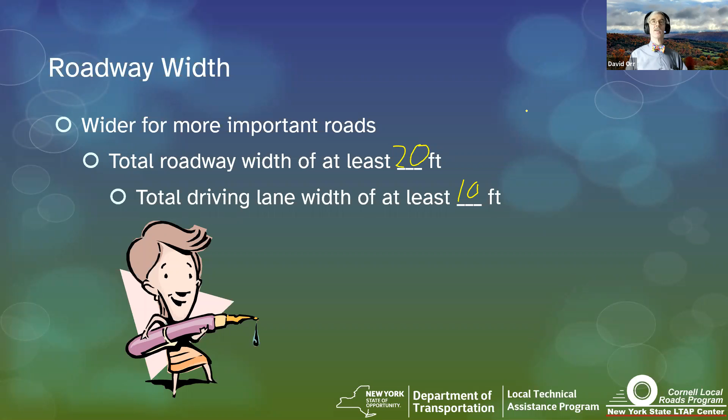It's a dead end, doesn't connect to anything. And yet that isn't appropriate - could it be for turning your truck around? Maybe you got to turn around at the end. This isn't part of the truck turnaround, though - that's behind me. They do have a snowplow turnaround back there behind me, but they needed the extra width.

That's why it's so important to know the land use. Power company access, very good guess - that's extremely good, it's not correct, but only because it's a different access. The idea is let the land use define what you need.

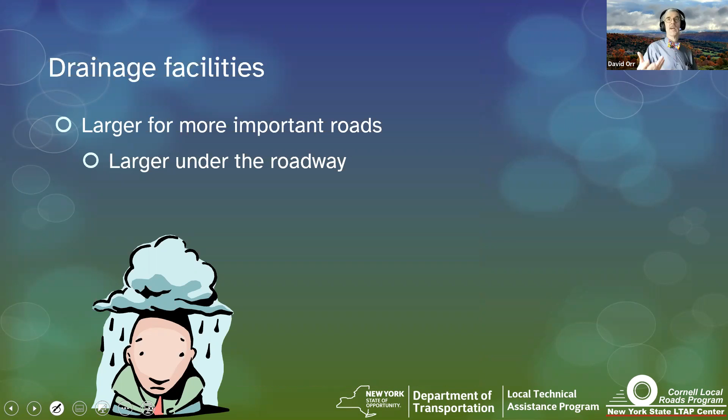Now, drainage facilities - you're going to put in larger pipes for more important roadways, a larger pipe underneath the roadway, and you probably should define a minimum size pipe. Why would you define a minimum size pipe? What reason would you have for a minimum size, and what number would you put in for a minimum size?

We have a recommendation, but other agencies I know go with a different number. What's the minimum size and why the minimum size? Some people say 6 inches, some say 15 because it's easier to maintain. Yeah, that's generally what drives the minimum size - your operations and maintenance. You don't want it to plug up. If you've got flushing equipment that's 15 inches, or you're concerned about freezing, you want to put 15 - that's fine.

If you want to put 12, that's what we put in here, but I'm not saying you should do 12 - you should put in the number that matches your operations. I wouldn't like to go less than 12, just because it doesn't take that much to put a 12-inch pipe in. But underneath the roadway, maybe you have a different size minimum - maybe the driveways are 12 and under the road is 18.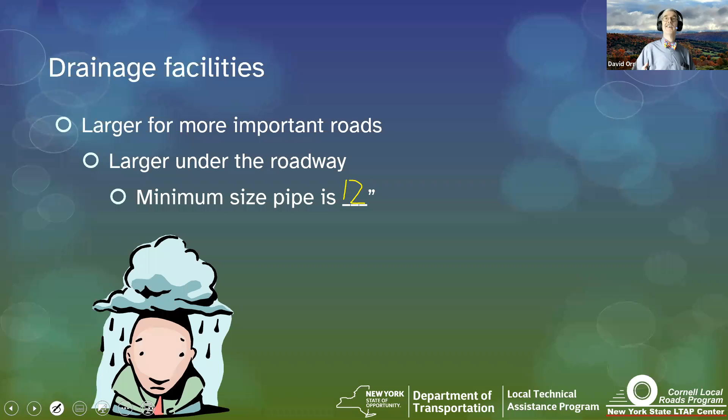The big key is you set a minimum size and then you design for certain flood frequencies. We had some recommendations, the state DOT had some recommendations, and about 3 or 4 years ago we actually worked with the folks in local projects to harmonize those two sets of numbers. I'll be totally honest, they had different numbers than we did - we didn't come to the same place. But at the end of it, we do have a set of consistent standards. And remember, consistency is important.

So if you look in the standards we've given you, you'll see a table with design flood frequencies in it. I'm not going to go through it, we don't have the time, but you can pull that up. It's the exact same chart the state has now in their highway design manual, so there's consistency to it, meaning the culvert underneath a roadway handles a certain size flood. It defines it by local A, B, and C - those same standards that are in the guidelines.

So what's the minimum design storm that you want to be able to handle? It's going to be different depending on the type of roadway. You could either follow this chart or you could set your own. For very low volume roads, you might only need a 10-year storm, or a 10% storm, even for a culvert. But that's assuming you're not on a dead-end roadway, because on a dead-end roadway you probably need a larger pipe. Different size storms for different conditions.

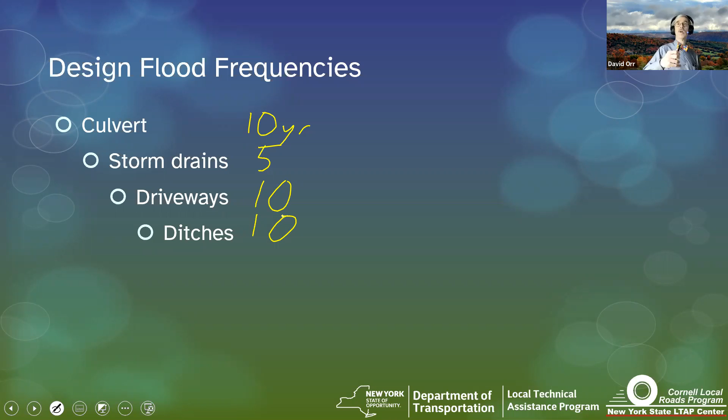So your storm drains, how often do you want to let them flood? You may not even have them in a rural area, but maybe you could do a smaller one. Even a 5-year is probably enough in a lot of cases. A driveway, maybe a 10-year minimum. These are the numbers we have for the AB type roadways. You could set a larger size if you want. But again, are you going to use that same standard on your own for your own road network? If you are, great. If not, you may want to modify your standards slightly.

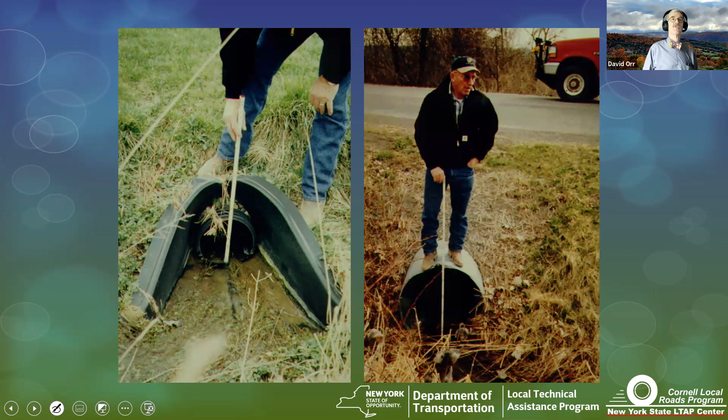Now, we're not going to have much time today to talk about the installation of pipes. We're talking about geometry, but I always try to remind people that how you install pipes matters. Keep that at the top of your queue. And remember, when you're checking existing pipes out, just go upstream and downstream and put a pipe between the two. So while we have design storms, see what's already out there.

Same thing with the overall guidelines. If the existing road works, you're probably good. If you're not sure, go get some help.

Now, in terms of signs, what sign standard do we follow here in New York State? The MUTCD, the Manual on Uniform Traffic Control Devices, and the most important word in there is uniform. Here in New York, we have the National Uniform Manual, and there's a New York State supplement to the MUTCD. You have to follow both.

Most of the time the national controls, but there are some exceptions. For instance, an exception we have here in New York is we're allowed to use a slightly smaller street name sign for 30 miles an hour, while the national standard says you have to go down to 25 miles an hour, because our most common speed limit is 30. So you need to check both out.

Now, we do have a handbook you're probably aware of, called the Traffic Sign Handbook. It covers about 90% of the signs in rural areas and most signs in urban areas that aren't parking signs. But technically, you still need to be following the MUTCD. That's just a guide to help you out, to save you some time and trouble. If you need a copy of that, you can go on our website or let us know, and we can get you one.

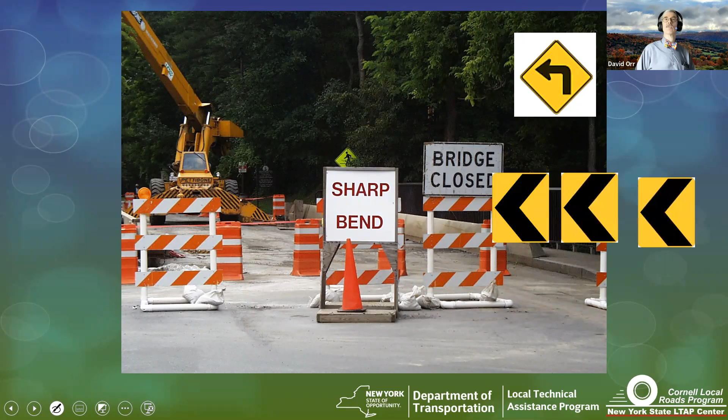Snow and ice control - we don't think about that as being part of our geometric standards, but they should be, because the heaviest vehicle on our road, which we'll talk about next week, is our snowplow. It's allowed to carry extra weight, and guess what - it goes out in the middle of the winter.

So you may want to include thinking about dealing with snow and ice control when you're developing your geometric standards. What are your operations set up to do? Do you want to allow an unpaved road if all of your road network is paved? Probably not. Do you need extra width because you've got larger trucks, because most of your roads are already pretty wide, so maybe you need bigger intersections. So again, things to think about, to put into your standards.

What standards? Clear and easy to understand, meets the needs of the public, and it's used for all roadways. Are you going to use AASHTO? The Little Green Book? The guidelines from the Local Roads Coordination Council? The standards on our website? Pick from that list, but think about it, adopt them, and start using them for all of your road network.

Now, to end this time together today, we're going to do a couple of questions, technically for the PDHs, and a couple of geometric case studies. Not going to take a lot of time, but I do want you to think about a few things. So first, a couple of PDH questions, and then we'll do the case studies and get us done here right about noon, okay?

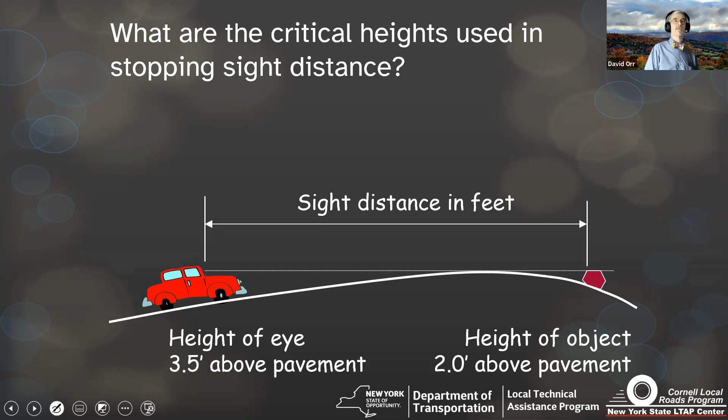Now, I hope you remember, what geometric standard is missing from the little Greenbook? Grades, yeah, not cross slope. Cross slope is actually surprisingly in there. I'll show you the answer for that question. We'll talk about cross slopes here in a minute.

What's missing is the grades, centerline grades of the roadway, the maximum grade, longitudinal grade, because of mountainous steep curved terrain. So what do you need to do? Go to something like the Highway Design Manual from the state or the AASHTO Green Book itself. Pick some grades from there and justify why you're using them. Add them in, okay.

What you're going to use depends on where you are. If you're in Alabama, and yes, there is a town of Alabama here in New York State, you probably can just use it as is. It's very flat country up there, you don't have to worry about it. But if you're down here in Ithaca, or up in Lewis County, or down in the Catskills, you may want to pick a grade.

Generally, for most municipalities, you would pick two grades, one for the higher speed, one for the lower speed, and choose the worst case for your agency. Though again, if you're a large county or large municipality, or you have huge variations, you could even have variations depending on terrain type.

Now, in terms of cross slope, there's a lot of stuff in here about cross slope in all of these guidelines, and we'll just quickly run over there. So I'm going to open up the Greenbook here. There's whole tables in there that talk about cross slope, okay? And I'm just going to quickly scroll down because it's not that big.

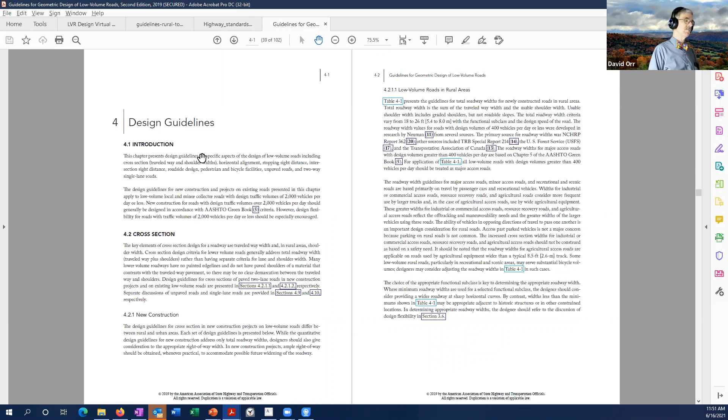That's the roadway width. There's horizontal alignment stuff. Okay, and then we have here side friction factors, just like in the main Greenbook. And those side friction factors depend upon the cross slope that you're dealing with. Super elevation rate for curves, but even for crowns you can talk about.

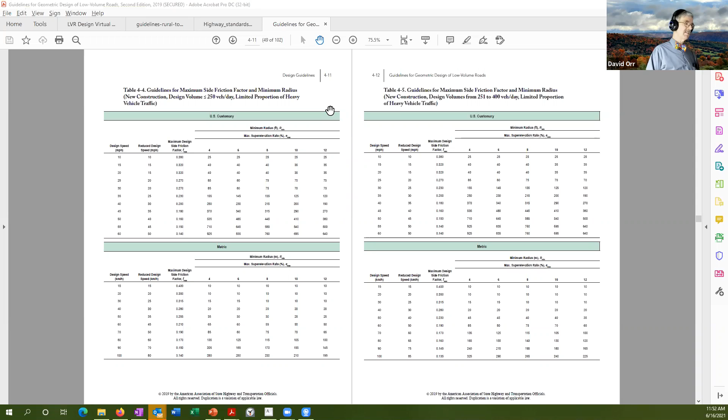You've got there. Generally, the cross slope, by the way, is defined by the surface type. So if it's a paved road on a straight tangent section, you're talking about a quarter inch per foot, or 2%. If you're on a gravel road, you need a little steeper, three-quarter.

So what I want to do, I've got a few minutes here, and I'm going to give you two case studies. I'm going to give you a rural one, and then we're going to do an urban one.

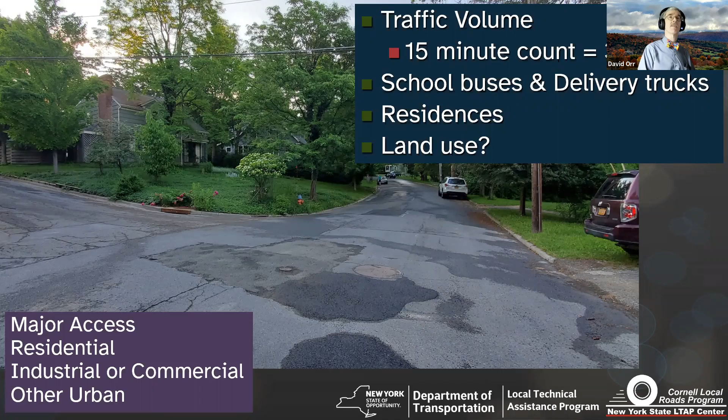So that's this week's session on geometry, a brief overview of what's available to you. Please pick a standard. If you're able to join us next week, we're going to be talking about pavement thickness design for lower volume roadways. There are limitations, just like for this topic, where you shouldn't use it. For geometry and even for thickness, once you get above 1,000 you start getting near the edge, and 2,000 is the upper limit for the stuff we provided to you per day. That's still a lot of your road system, and most of the guidelines for really low volume stuff is 400 vehicles per day.

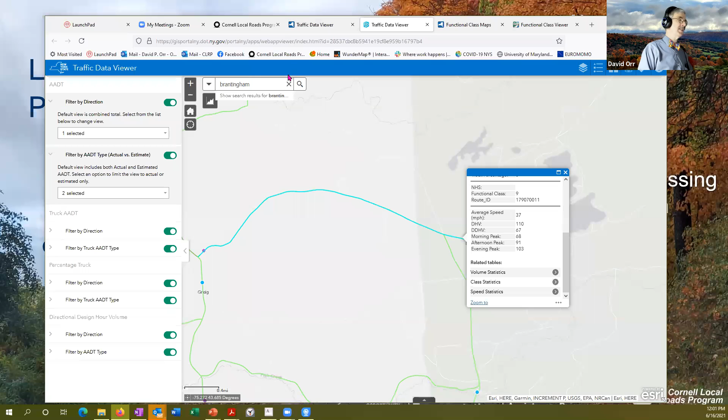Oh, here goes: is there an evaluation procedure we can follow to determine when to pave a road? Yes, I'll tell you what, it'll take me just a second. Let me just do this. Under our website, under library, under publications, you scroll down near the bottom, you'll see a couple of miscellaneous publications, and then publications by other agencies right at the bottom. There are two in here, the Gravel Roads Construction and Maintenance Guide and the older 2000 version.

Okay, I'm going to go ahead and click on this, and this is the website. I'll throw it in the chat pod, so you'll need to go to the chat pod, or you can just go to our website. This is some errata, so let me get past that. It looks like this, and it's got a pretty good procedure, the steps to think about, those 10 steps. Let's see how good my memory is. I'm going to scroll near the bottom, and it's probably still downloading because my internet speed at home is not as fast as it is at work.

Let's see how I did here. I know I'm making everybody dizzy. Nope, I went too far. Nope, my memory is not good today, Joe. So I'm going to go back to the beginning, and I'll actually look at the table of contents real quick. Oh, that's right, I'm in here.

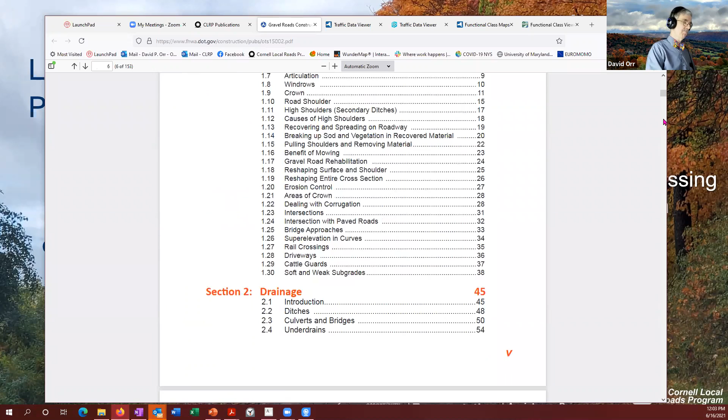Section Appendix D 115: when to pave a gravel road. Okay, and you can go through, it gives you the steps, a series of questions to evaluate and ask. Then when you've got those questions answered, you can decide when and how to go about the process. It's a pretty good procedure. There's no exact number, I'll tell you right now, but it's a good set of steps to go through, and if you do that you should be in pretty good shape. I would use that too, by the way, to unpave a road, just follow the steps in reverse. Okay, does that help you out, Joe?